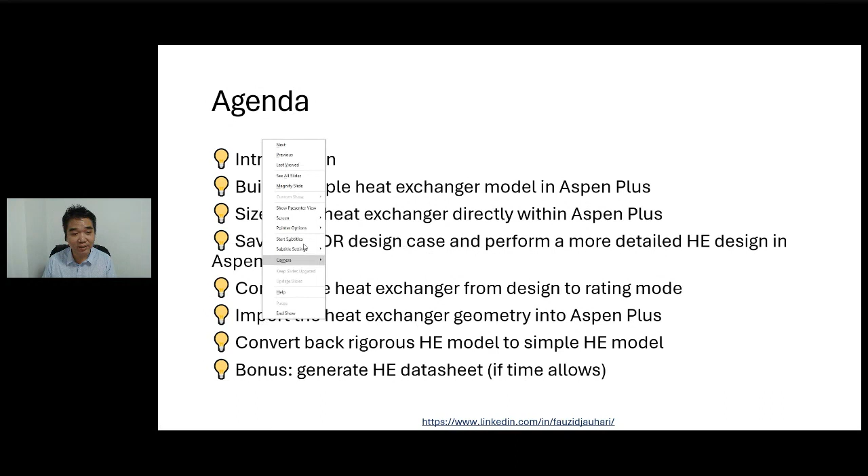Then next, after that, we will import back the heat exchangers to Aspen Plus for simulating the performance rigorously. Then we also going to talk about sometimes we want to convert the rigorous simulations back to a simple model using a UA constant. So we will talk about how to convert that back to a simple model. So if time allows, I will show you how to generate the heat exchanger data sheets.

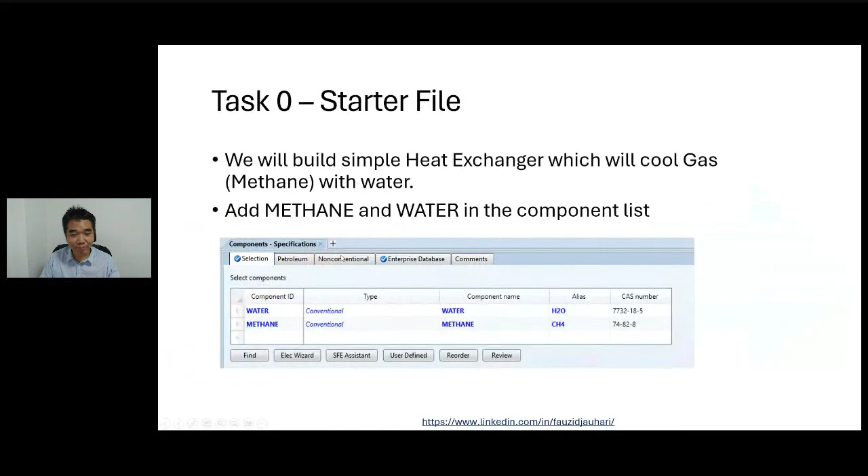Thank you. All right, so let me go to the software directly. I have created this simple Aspen Plus model. Let me go through. In terms of the properties here, under the component list, I only have two components. So in this example I'm modeling a gas cooler, and the gas itself I'm just modeling as methane, and I have water as the cooling medium. Only two components, straightforward. For the method I'm just using the common Peng-Robinson. So that's in terms of the properties, and in terms of the simulation, it's also straightforward.

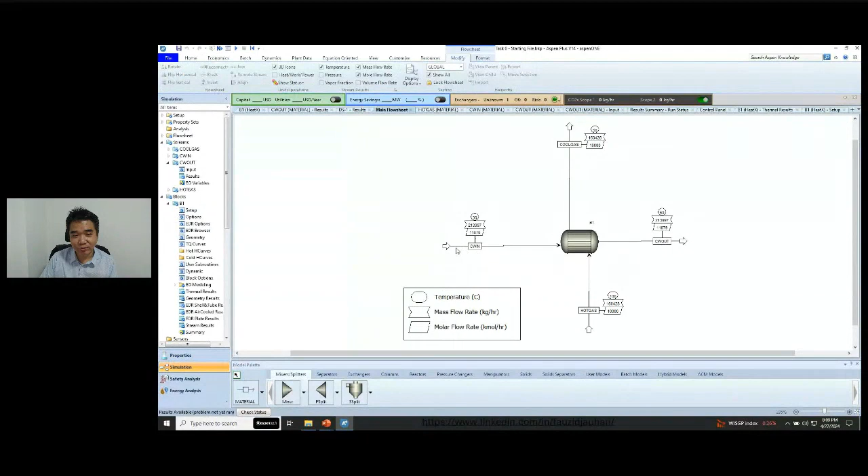So I have this stream of hot gas. The temperature is 100 Celsius, and I want to cool it down to 50 Celsius. We have the flow rate, pressure, temperature, and the composition as pure methane defined here. And we have this cooling water also. My target for the cooling water is from 30 to about 50. Maybe it should be 40, but yeah. Okay, so that's the cooling water flow rate.

So let's say you have built this model. Essentially, when we build this heat exchanger model, you add this in here as a heat exchanger, connect the streams, add the stream details. So mainly this is a heat and material balance type of simulation. You can see here under the heat exchanger it is a shortcut module. I can choose, for example, the hot fluid is in the tube. I can specify my exchanger specification. There are different specifications. Typically, I choose my target outlet temperature for the hot stream, in this case the methane gas. I want it cooled to 50 degrees C.

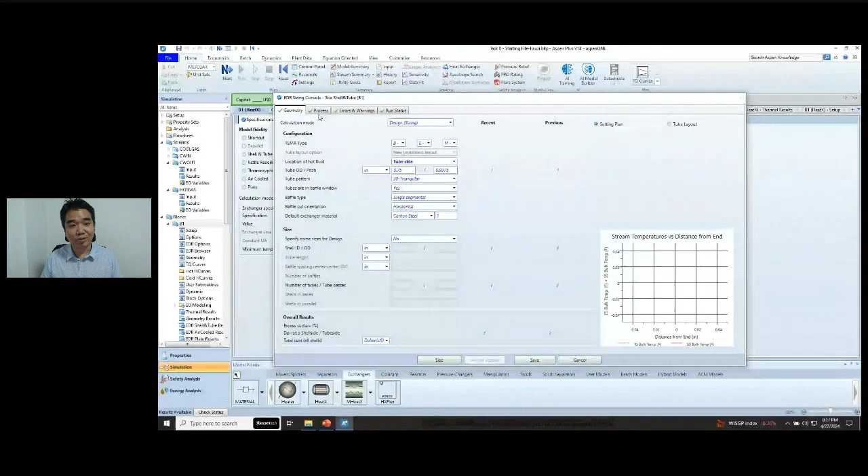Minimize cost, right? And you can see here the process data is pretty much transferred here. Of course, if we want to increase the margin, for example, on flow rate or on the heat exchanger, we can do that, right? One thing here, I think we can put this hot side target temperature as 50, right? And what we need to pay attention to, in addition to the process data which is automatically transferred, is whether you need to put margin.

The other thing is the allowable pressure drop, right? Basically I go by default about 10 psi. Then maybe the fouling resistance, how much fouling resistance you want to consider, right? So I'm putting some numbers here. So pretty much we are done. We don't need to actually enter this data. It pulls the data directly from the process simulation, right? Now I can do the sizing.

So what EDR will do, it will iterate based on different configurations, right? It will vary the length of the tube, the number of passes to actually come up with the optimum minimum cost for the heat exchanger. So we will click this size. You can see it's evaluating various cases, and it will tell you which one is okay. Okay, so now it has come up with the design, right?

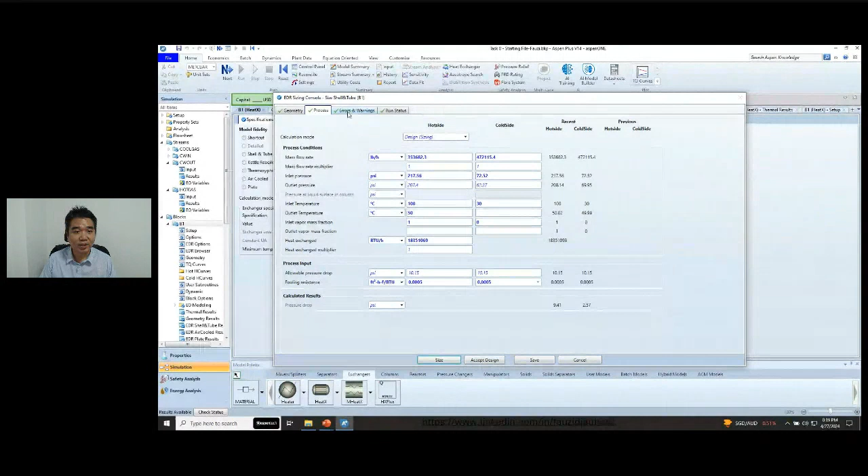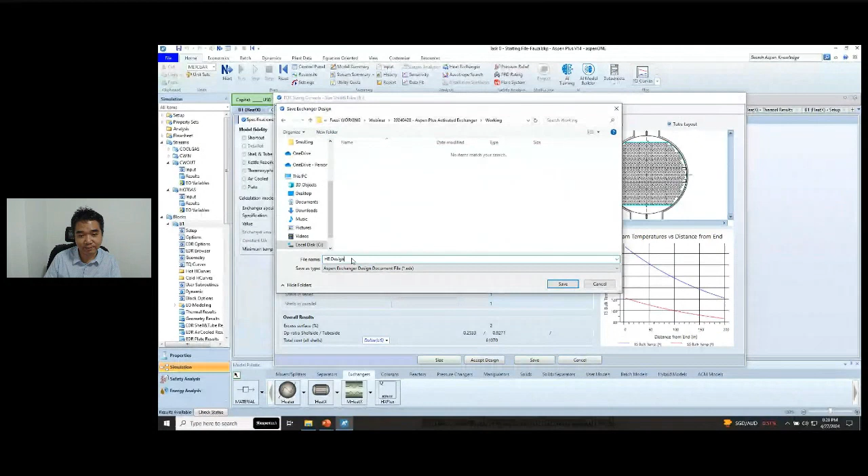You can see if there's any error, right? And we can go back to the geometry. It actually shows you the rough sketch of the heat exchanger, the temperature profiles, the tube layout. So what I'm going to do now, I'm going to save this file. I can save this design as an EDR file. So let me create this. This is, let's say, heat exchanger design number 1. That's the EDR file. And let me go back to that folder and open this file, right?

Okay, you can see the same input, same output, right? But of course, when we open it in the EDR, we have more handles or more things we can do, right? So typically, that's what I do. I do the sizing in Aspen Plus or HYSYS. I will save the EDR file and do more in EDR.

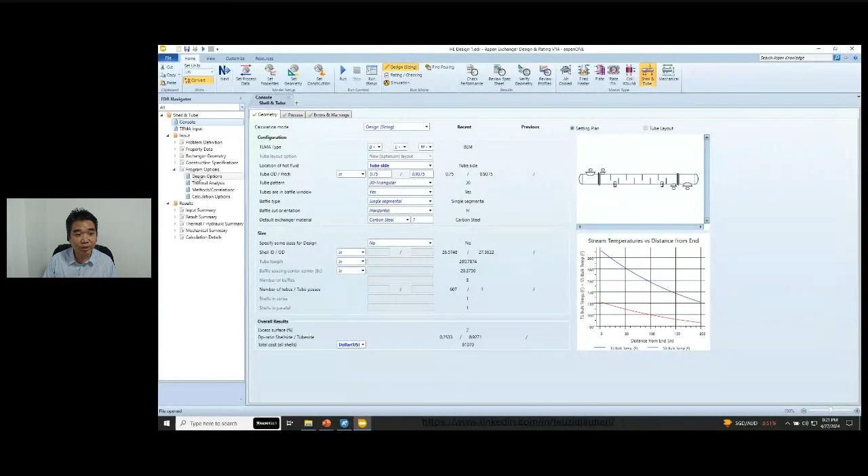For example, in EDR, we can go into this. We can specify constraints, for example a layout constraint or geometry, like I don't want to have the length more than a certain length, right? I want to have this in one heat exchanger, or how many in series or in parallel. This is something we can define. This is process limit, right?

You can specify, and of course the optimization. There are two. By default is minimum cost, but you can also choose minimum area, right? So we have more handles, and you can see here under results you get more results. One of the important results for me is the optimization part. It tells you all the heat exchangers it considers, the different heat exchangers, right?

So you can see here, this is the selected configuration, right? It will tell you also for different tube lengths and configurations whether that design is okay or is almost meeting the criteria. The criteria mainly are two things: the pressure drop criteria you have put, whether it's exceeding the allowable pressure drop we have specified or not, and also the area

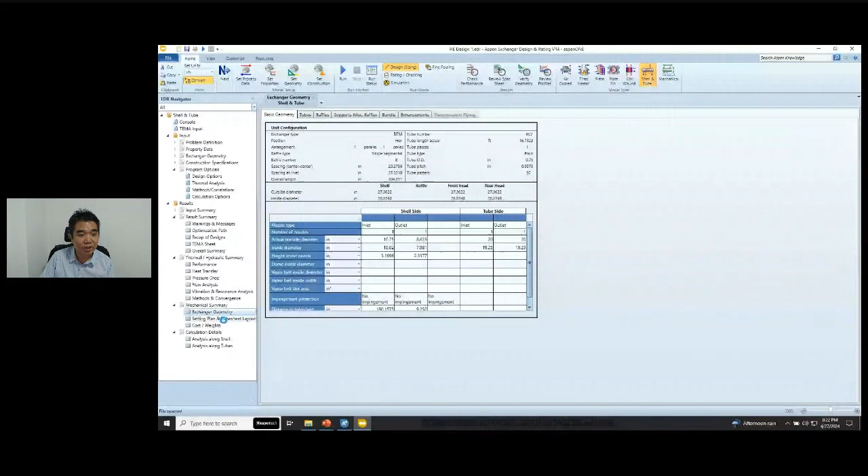ratio, right? So whether this design actually will have area more than the required area. That's the area ratio. So it should be more than one, or if you need a buffer, then it should be one plus the buffer, right? So this is, I think, one of the important ones. Of course, all the details of the heat exchangers you can see here. Some drawings.

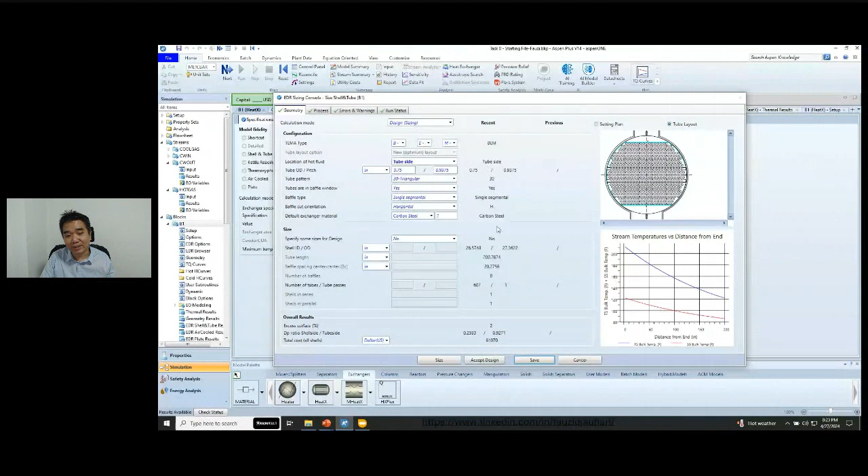Let me go back here first. So remember we have saved design number one, right? So let's say I accept this design. I want this to be incorporated into my Aspen Plus. So I can click this accept design. It will transfer the geometry, and now it's switched. It's modeling the heat exchanger under simulation mode, right?

And basically it's using the rigorous heat exchanger model, rigorous shell and tube heat exchanger. So the pressure drop and the heat duty will be calculated based on the geometry. Okay, of course, there's some warning. I think the warning is on possible vibrations. So I'm not going to address that at this moment.

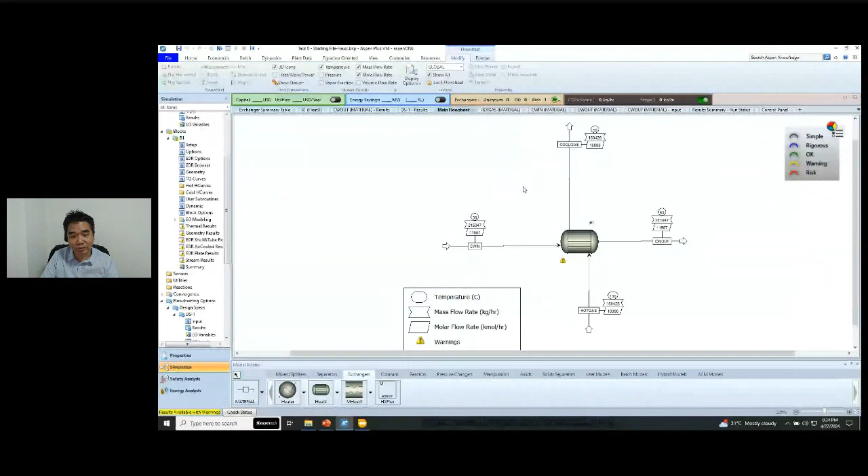So you can click this dashboard to look at the summary of the heat exchanger. And you know this heat exchanger is in rigorous mode because the mode status is referred to simple. That means it's now in rigorous. You can also go here to show the model status legend. You can tick that and go back to the main flowsheet and it will show you the legend: warning, risk, right?

Okay, now let me go back to this heat exchanger, this EDR. Let's say this one is under design mode. So you can see under design mode the heat exchanger. Let's go back to the geometry. The input is only this much, right?

Now, what I'm going to do is choose a different heat exchanger. So let's say I want to have design number 4. So instead of 16.7 length, I want 15.7 length. Let's say I select this, right?

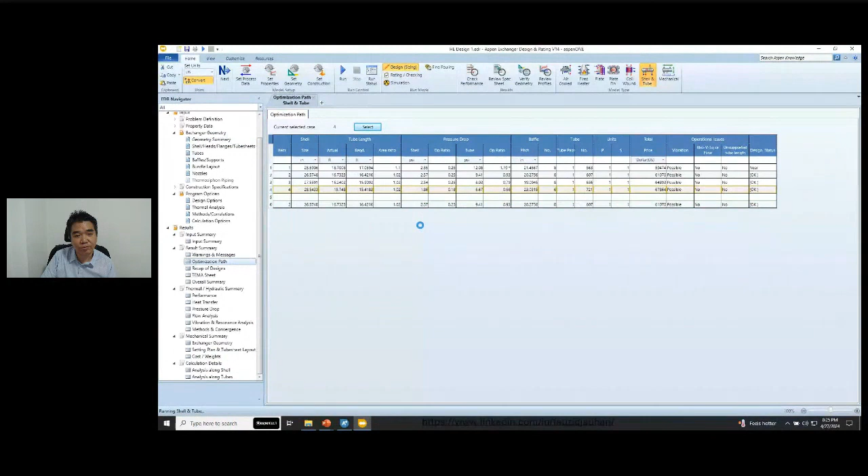Okay. So now I want to switch to rating mode, right? So I'm going to use that current design. So if I switch to rating mode and go to input, geometry summary, you can see here the geometry summary just now was only this part that is specified.

Now, because we copied all the results of the geometry into the input, in rating we fully specify the geometry. So now you can see we specify the shell diameter, we specify number of tubes. We can check this in feet. So this is design number 4. You can see the length is 15, not 16, right?

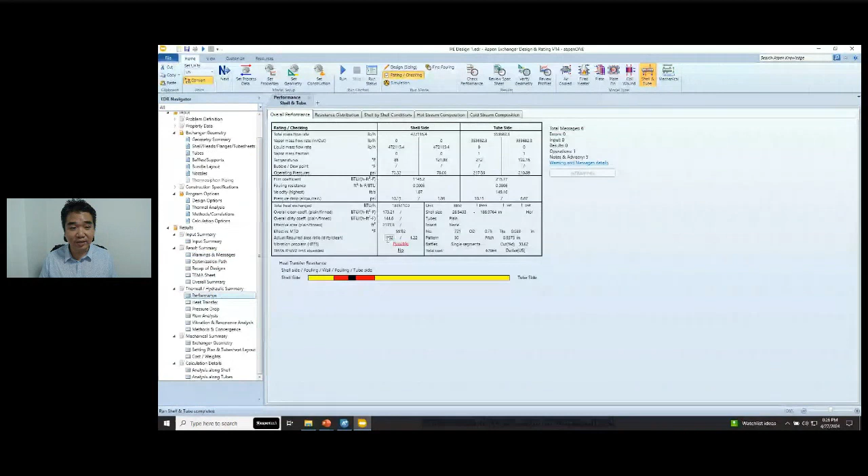So now I can run this case. This is typically how it is done: you run a design case, then you switch to rating. A rating case can be for fine tuning the design, or can also be used for checking an existing heat exchanger, whether it's sufficient or not. The main output of the rating you can check under performance, the area ratio. Typically we look at whether the area ratio is bigger than 1.

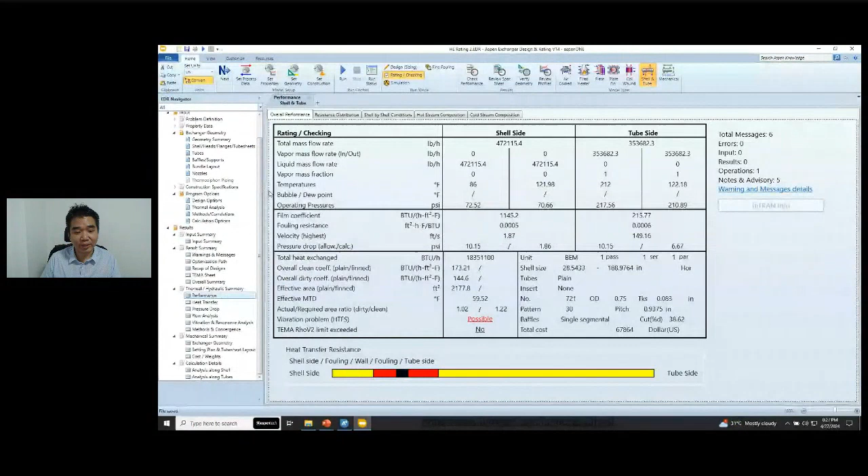Right. So I now have design case 2, which is geometry number 4. Let me save this as rating case number 2, so a different geometry. So I can go back to this. Remember, just now we converted the heat exchanger by sizing it and importing the result of the sizing. Now I can actually specify the heat exchanger.

So let's check first when we go to the EDR browser here. You can see the tube length; this one is the first design, 16.7 feet. So let's say we have fine-tuned the design, and we find that design number 2 is more suitable. We can import it and replace the EDR file with that.

So we've done the size heat exchanger. Now we specify the geometry. We can click this specify geometry, and we can import the EDR file. We can browse. So the EDR file is this, rating number 2. So I can click convert. Okay. So let me run.

Okay, it's done. Let's go to the EDR browser. You can see now the tube length is 15. So I imported the second geometry into this Aspen Plus file. Okay. So I've talked about sizing. Let me go back to this agenda. So I've talked about the simple heat exchanger model.

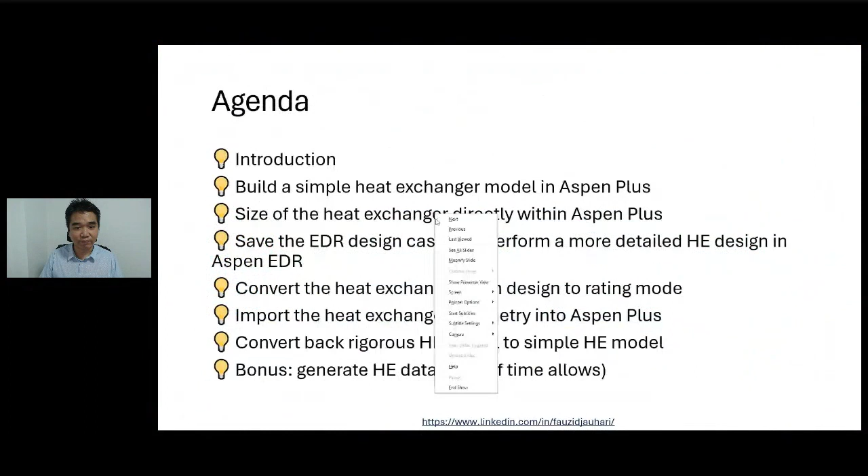So I've talked about the heat exchanger model, the sizing, reviewing the EDR, performing the design case, performing more detail in the rating mode, converting the heat exchanger from design to rating mode, and then importing the geometry back to Aspen Plus.

Okay. Now I'm going to talk about how we convert from the rigorous model. Sometimes we have a big flow sheet, and we want to capture the characteristics of the heat exchanger, but we don't want to run it. If you have a rigorous model, it sometimes takes time to calculate, because it performs rigorous calculation. So we want to capture the essence of the heat exchanger, and typically that is represented in UA.

UA constant. The A represents the surface area, and the U represents the heat transfer coefficient of that heat exchanger. Of course, the heat transfer coefficient is based on certain operating conditions, a certain flow rate, because if the flow rate changes, the velocity will change and it might affect the heat transfer coefficient. So if in my simulation the operating condition will not change too much, I can still rely on UA as a constant.

So I will talk about converting the rigorous heat exchanger model back to a simple model. Let's go back here. How do we know this is rigorous? If we go into the model setup, we know this shell and tube is rigorous. If you go to the EDR browser and can open it, that means it's rigorous. Also, you can click this dashboard. You can see B1 revert to simple. Means what?

Means that the B1 currently is actually rigorous mode, right? So I will show you two ways of converting this back to simple. The first one, of course, through this dashboard, revert to simple, you can click this, right? So it will ask you what type of model you want, shortcut. And typically, I will actually use this shortcut, but I will copy the calculated UA and the pressure drop, right?

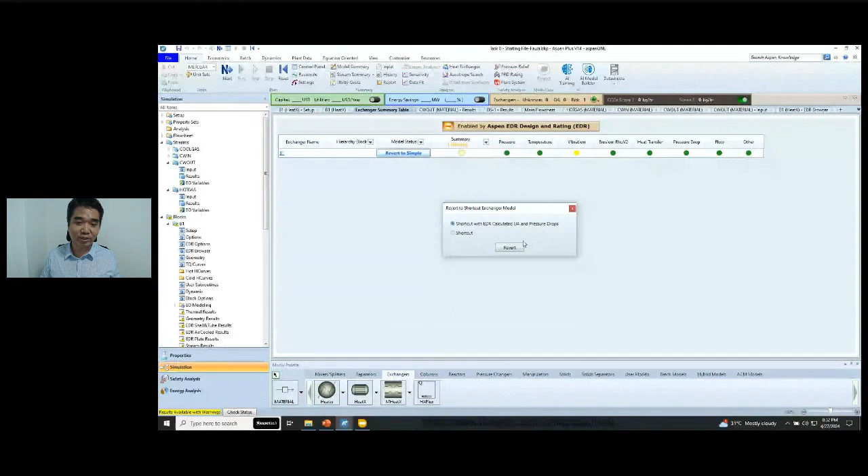So I can click this. So basically, it will specify this instead of, right. So now it's basically running on simulation, but it's using this constant UA, right? The pressure drop should be also based on, okay, this is using the outlet pressure, but that's calculated based on the pressure drop, right? Okay, so that is the first method. It's actually just a different button, right?

So let me switch this back, right, to rigorous, and I'll show you the second button, right?

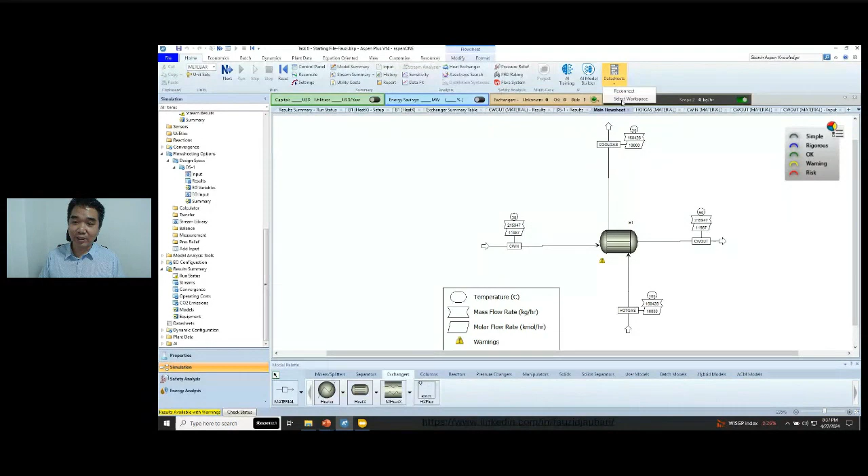That means that the Basic Engineering data is stored in your laptop, but if you have multiple people working on a project, you can also set this up. You're connecting to the Aspen Basic Engineering server, right? You can click this select workspace or reconnect, right? So it will ask you. So in this case, right?

So I'm using this laptop as a server, so I'm using personal workspace. But if you use Aspen Basic Engineering as a common collaboration project, you can point to the server of Aspen Basic Engineering, right? So you can point to the location, right? So in this case, I'm using this as a personal workspace. Right?

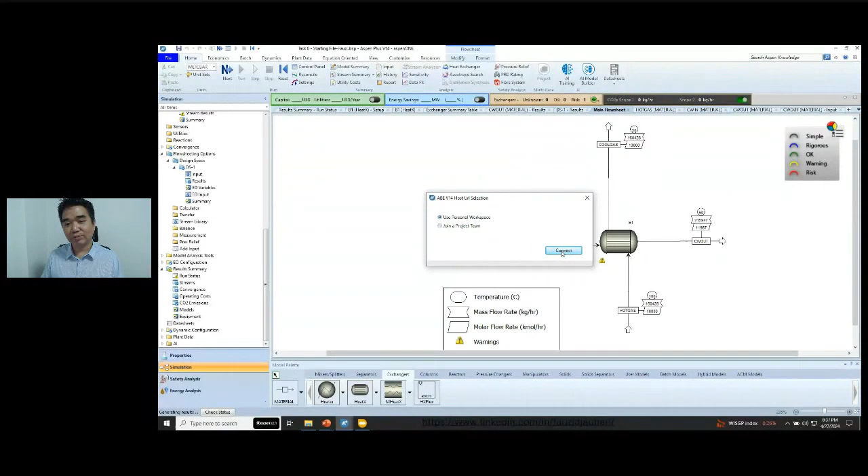So what's happening now is basically Aspen Basic Engineering will read what are the flowsheet objects in this file, right? So it will identify the streams, the equipment, right? So we only have one equipment. Sorry, this is okay. So we can choose to connect to an existing workspace, existing project, or we want to create a new one. So let's say I'll put it as demo one. Okay.

So it's creating the project database, right? Okay. It takes a little bit of time. So it's reading the information from Aspen Plus. What are the objects in Aspen Plus? Right? So we have one heat exchanger, 4 streams, right?

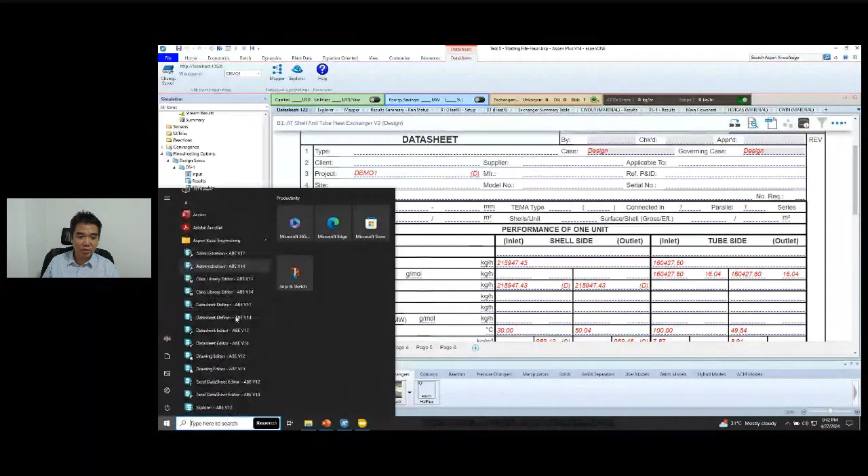So you can open Aspen Basic Engineering, called Explorer, ABE version 14. Right, so I'm going to connect to the workspace. Remember the workspace was demo one, right? So this is the workspace we created. We can open it. Okay, now we can see, for example, the different major equipment. There's this heat exchanger. So we can also see this datasheet. It's already created, so we can open it later on.

But I want to import data from the EDR, right? So there is tools, thermal design. You go to tools, thermal design, right? So file, import from a file. I'm going to import from the rating file. The intention is I want to import the geometry, right? So it's importing the EDR file. It's opening and reading. Okay, it's done. We need to see the log, right? So I can close this.

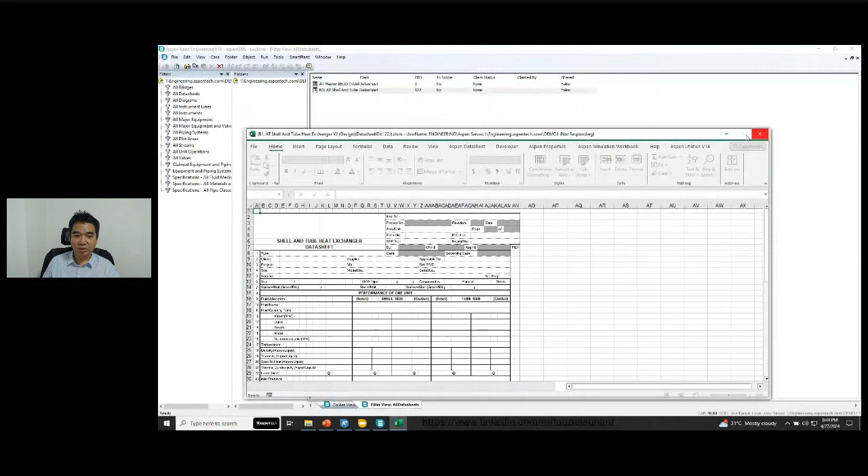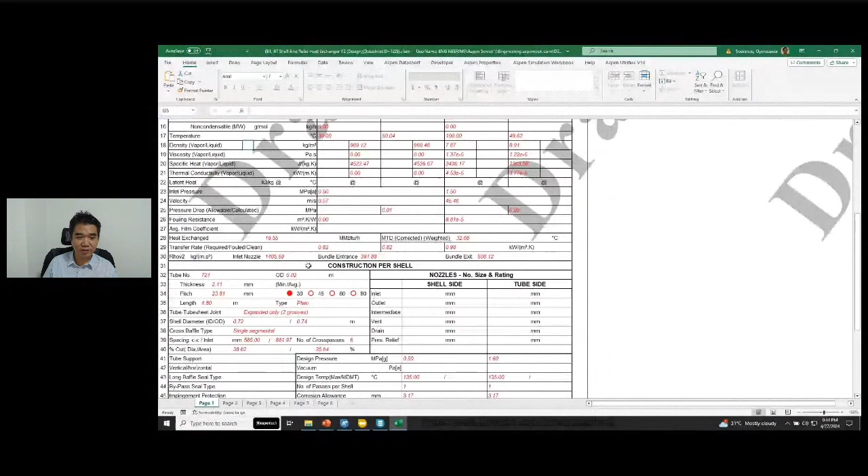Right, so now I can open the datasheet. I double click this datasheet. It will open an Excel, but this is a datasheet, a linked datasheet, I mean. It's not a dummy Excel, and you can see here all the data is transferred already. So it's very easy to produce this datasheet. All the process data, all the configurations of the heat exchangers, are copied here in this datasheet, right?

So for example, if I add something here, let's say the client is Fauzi. If I add that and go back to Aspen Plus, you can see this is updated. So if I update it here also, it will get updated there, right? So Fauzi 2, right? So it will be updated here. So this is a linked datasheet, although the format is Excel, right?

So these are the two ways of generating. You can generate within Aspen Plus. You can import the file. Currently, importing the file actually gives you more information. It imports the geometry, so when you create the datasheet, it fills up all the geometry also, right? Okay, so I think we've covered all the stuff we want.

Let me go to, sorry, if there are any questions. Okay, let me go to the Q&A. Right, so there is a question from Viraj. The key takeaway. Yeah, let me read slowly. Yeah. Thank you, Viraj. I think that's a very good summary of takeaways. Thank you so much.

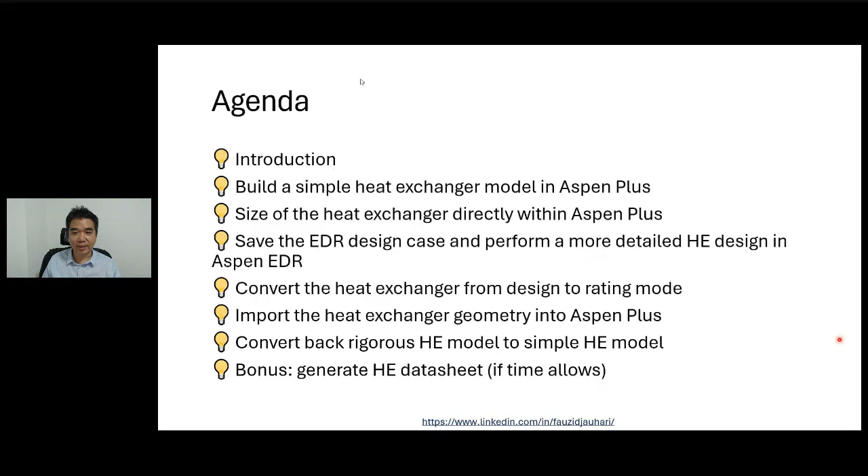Right, I think we are quite there. Let me go through this slide deck. Give me 1 second. So this is all the steps. Later on you can go through this on your own, but it's pretty much what I've demonstrated just now. If you find it useful, you can apply it in your day-to-day job, right?

So I didn't talk in detail about the sizing or the designing of the heat exchanger. Today I mainly talked about the workflow, from data transfer of Aspen Plus to sizing, to changing to rating mode, to importing back to Aspen Plus. I didn't really go into details of selecting TEMA types, etc. I think that's more detailed and needs more expertise in heat exchangers. We can review books, etc. I hope it was useful.